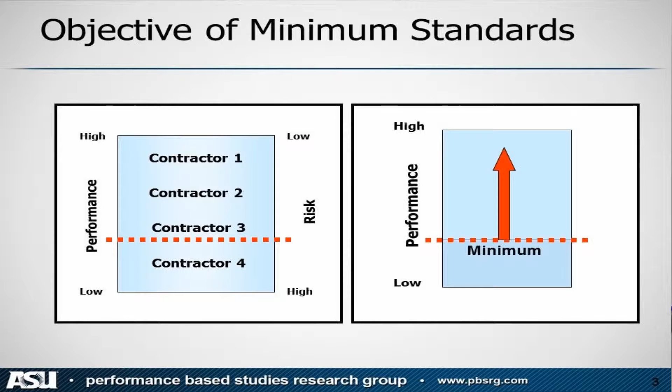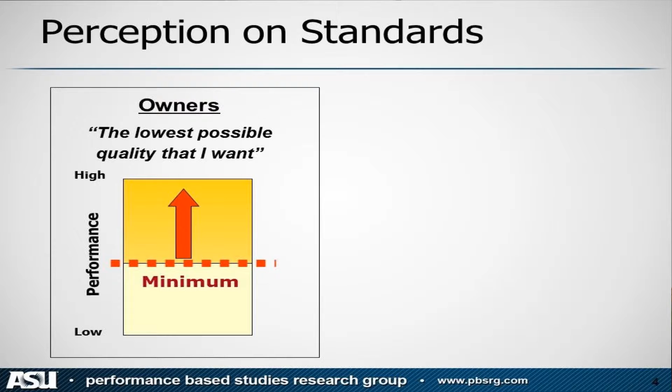And the way we communicate when we use minimum standards is we identify what the minimum is, but we want something much better than that. But all the vendors know that when you use minimum standards and anything above the standard is acceptable, they're going to drive quality which way? Why? Because when you use minimum standards, the owner's thinking the best value is the lowest price. So it creates an adversarial climate.

We say minimum, they say maximum. And they're going to spend all their effort as a buyer to ensure that their minimum is met. So what is going to happen here? What's going to happen is the vendors are going to play under the minimum line, and they're going to try to get as far away from that minimum line as possible without being what? Caught.

So now the owner has to know exactly what that standard is. The amazing thing about this is the standards are normally made up. And so it's very what? Subjective. It requires decision making, so it's hard to prove. Therefore, the vendors are continually taking that, quote, minimum standard, turning it into a maximum and driving it what? Down. And that is why all of our materials and all of our systems are being degraded.

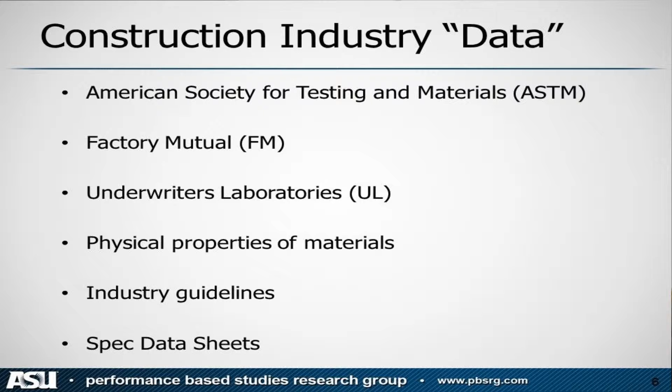And you have all these different groups, right, setting standards. And what they are, they're trying to identify the physical properties, set guidelines, and put it in specs. And the biggest group of all is ASTM, biggest one. So what they do, they get all the manufacturers to come in, they identify a product, and they try to identify the physical characteristics that that product should have.

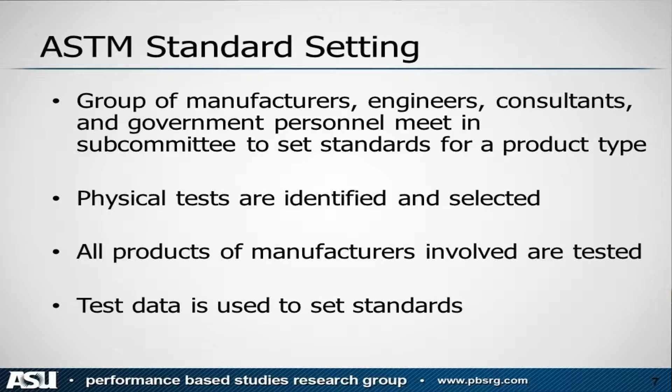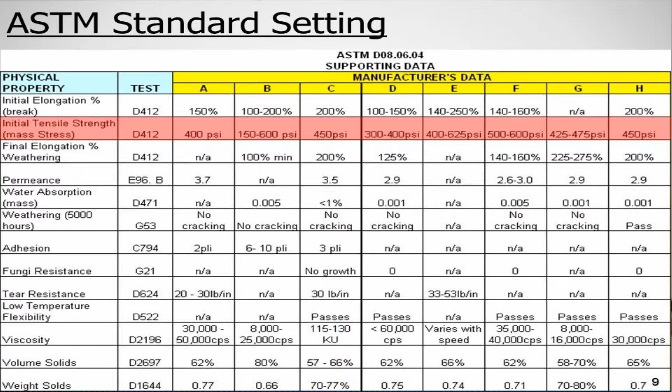Well, manufacturer A can't sell their material. So they have to go back and modify their material to meet the standard. Well, they're not going to do that. What they're going to do is they're going to take ASTM and the committee to court. And their lawyer is going to ask some dominant questions. First question they're going to ask is, how do you know that 400 is not good enough?

And the answer will be what? We don't know. Next question, how did you come up with 450? And they will have to say what? We just guessed. So then what will the ASTM committee have to do? Accept all the numbers, because they can't prove anything. So basically, that's what ASTM did, and it was off of a lawsuit.

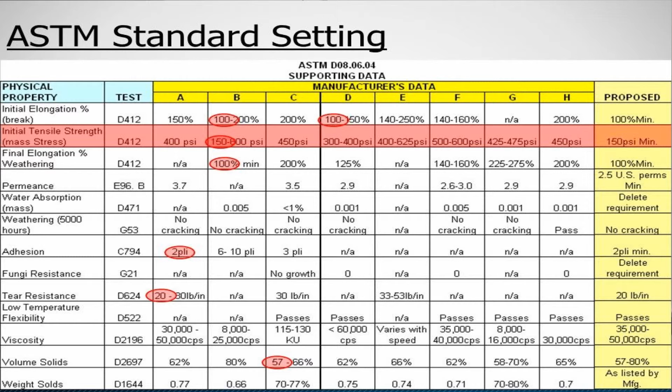So then the ruling was, you get all the numbers together, you put them in a matrix, and you pick the lowest in every category. And that's the standard. That's how the ASTM standards are set. If you knew this, right, you'd realize that ASTM standards for any material are what? Garbage, useless. They don't minimize any risk.

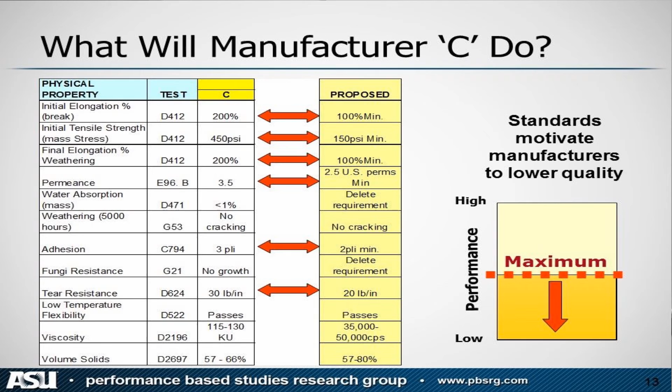So all the manufacturers quickly figure this out, right? They look at the cost, right? They're going to look at the proposed standard. They're going to look at their characteristics, and they're going to drop it so that they can make it the what? Cheapest way. So they can sell it. And that's it.